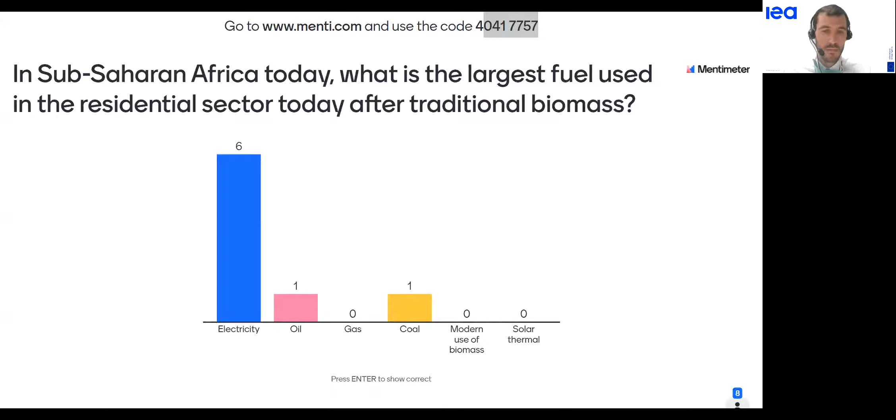Again, this question looks at sub-Saharan Africa as a whole. For such a question, the answers would be very country specific. In countries such as Nigeria and other oil and gas producers, it's very possible that oil and gas would have a large share of energy consumption in the residential sector. It can be gas through network, oil under the form of LPG for cooking, or oil under the form of diesel for backup electricity generating systems. These are indeed fuels that would be highly used in some countries.

The right answer is electricity, and you voted right for that, as this is the number one fuel used in the residential sector after traditional biomass. Thank you for your answers. So this was the situation for today.

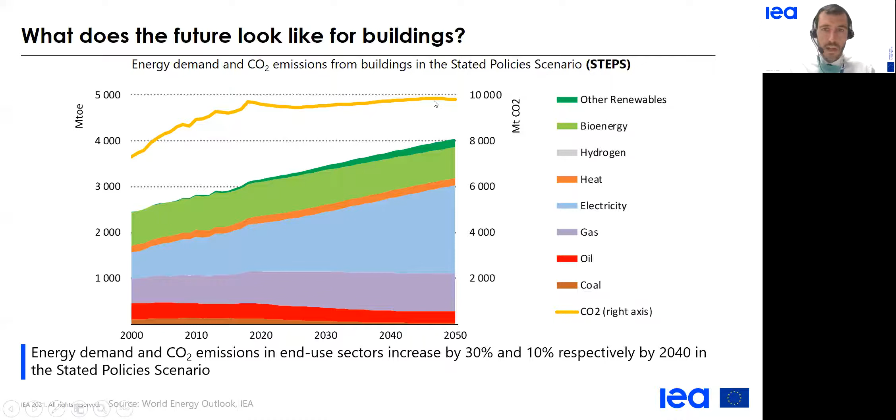So this is under the STEPS scenario, but a different future is possible. This is what it would look like under a sustainable development scenario, with universal access to electricity and to clean cooking, and with climate-driven objectives aligned with the COP21 Paris Agreement.

You can see that the CO2 emissions would sharply decrease, and this is due to a phase out of coal and a strong reduction of oil and gas at the benefit of electricity. What we would also expect here is much more energy efficiency to be able to do more with less energy.

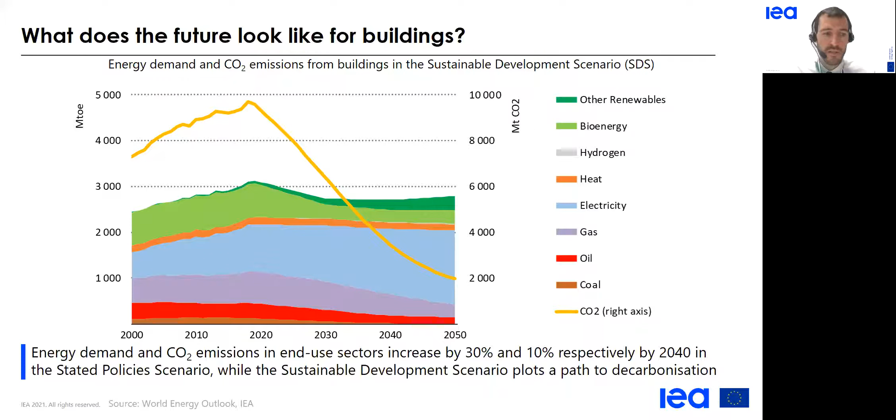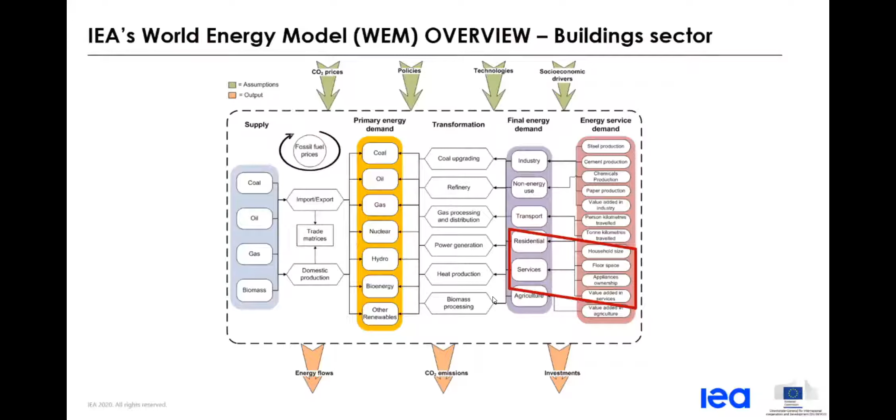When looking at this overview, we should not forget that an important additional feedback needs to be considered: the impact that electricity and heat prices and fossil fuel prices have on end-use demand in general, and in this particular case, on the energy demand in the building sector.

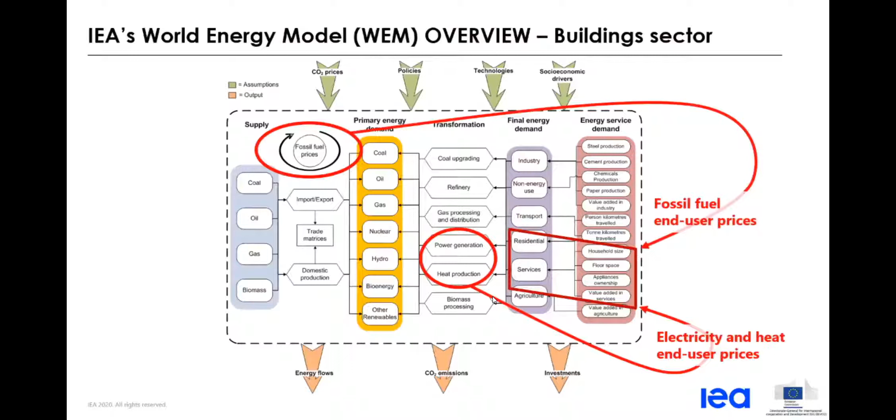When working on the sector, the first step before doing any modeling is to analyze what do people want. What they want and use are called energy services. In the building sector, it can be space heating, cooling, lighting, cooking, etc. To meet service demand, we need energy, and this energy is consumed by different technologies. In the building sector, it can be air conditioners, light bulbs, radiators, etc. And for each equipment, we also have its associated efficiency.

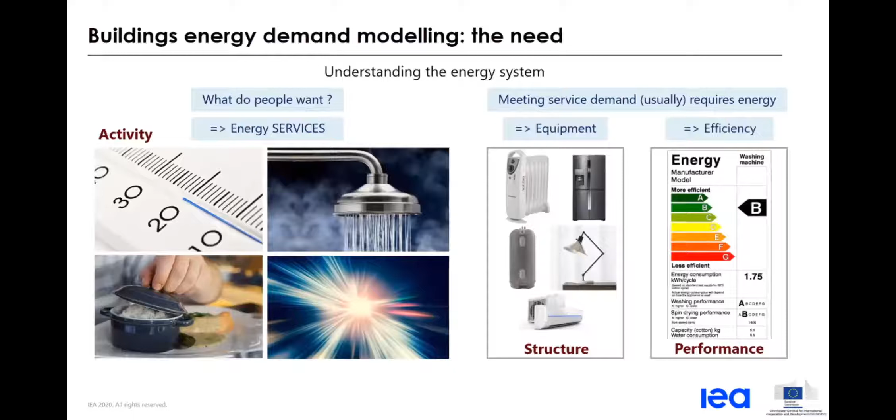We therefore can distinguish three areas: activity, structure, and performance. The activity is linked to the energy services. The structure is linked to the type of equipment present in the building sector, and the performance is linked to the efficiencies of the different technologies. And all of this needs to be depicted in the model.

If we look in more details at the structure of the building model, we see that we have different parts that make up the model. The first part includes all the inputs that are needed to do the modeling: historical data, regarding energy balances, building stock, equipment sales, and also socioeconomic data like population, electrification rate, or GDP. And we also do some assumptions for the evolution of some of these data, so for instance, population.

Some of these inputs will be used to compute energy service demand drivers, like household occupancy, floor area, or appliance ownership. Of course, these drivers will differ for each subsector. Indeed, the drivers are then used to determine the future useful energy demand, or the activity, as mentioned earlier. So for instance, for space heating, we can use the floor area as one of the drivers.

In addition to that, we also need a number of historical and future technology data that describe the structure and performance of our system. These data include the efficiencies, the lifetime, the market share of the different technologies. We can then compute for each end use what technologies will meet the service demand, and we will finally estimate the energy demand by subsector and by fuel, as well as the investments and CO2 emissions.

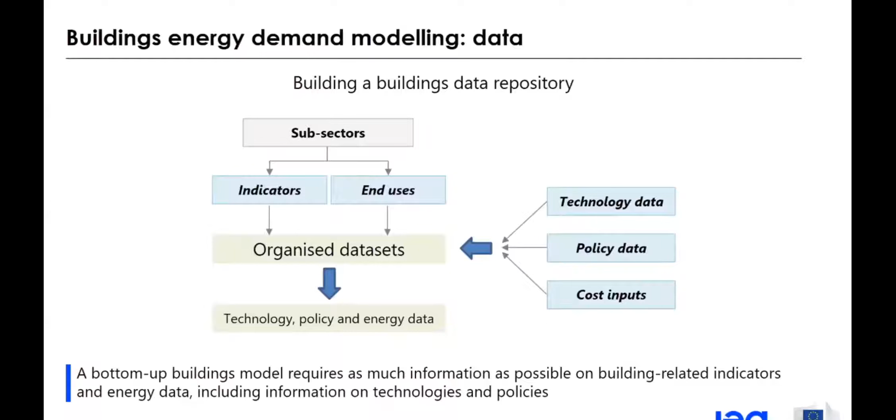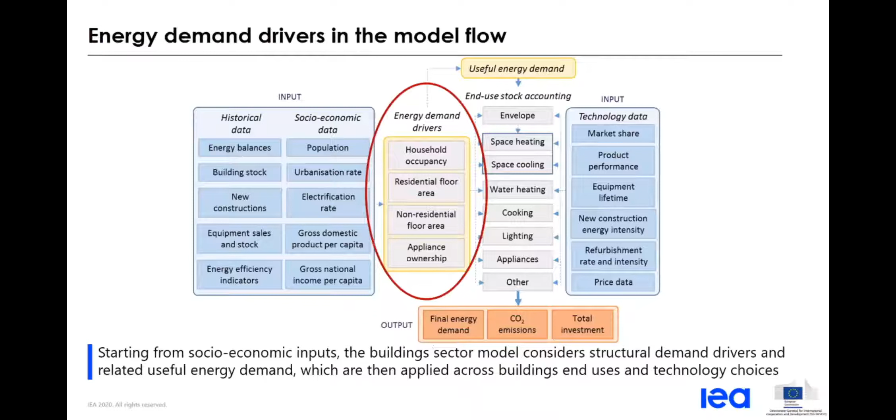As mentioned earlier, one important step of the modeling process is to define energy demand drivers, as they play a key role in describing energy consumption patterns in energy models. Thus, it's crucial to define the best proxy to describe past trends and possible future ones.

Before looking in detail at drivers and different methodologies to estimate them, here is the general structure for modeling end-use sectors. First, with drivers and econometric analysis, we estimate the evolution of energy service demand, or useful energy. Then, to meet the service demand, we allocate different technologies. In the case of the world energy model, we use a cost-based approach. Then, with the efficiencies of the different technologies, we can compute the final energy demand.

Going back to the drivers, we will look over the next slides at possible methodologies to identify the best proxy for each subsector. The projections of activity variables can be based on regression with respect to GDP or electrification, but we can also use different types of curves, like the S-curve. And as mentioned earlier, this requires using different data that can come from the IMF or other national reports.

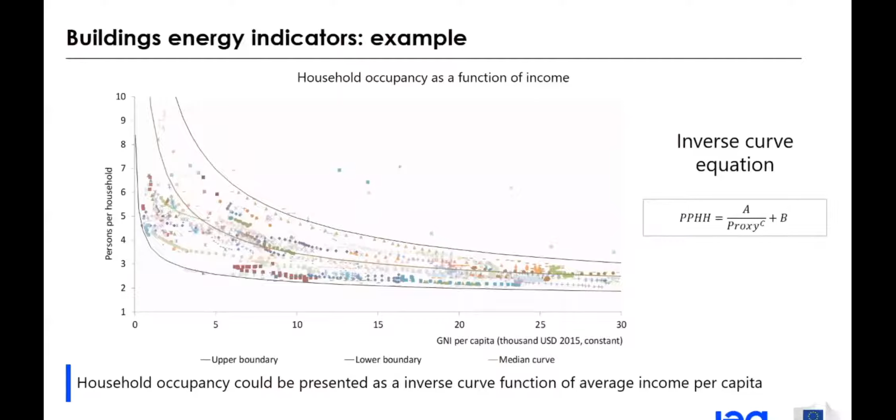So that's household occupancy. Now, another example of a relationship of interest to us in building's energy demand modeling is ownership variables - how the ownership of a given appliance, such as a refrigerator in this example, evolves over time based on another variable.

So here we've plotted ownership of refrigerators for all the countries and years for which we have data, plotted against a discriminant criterion, but we could also plot this against GNI per capita or GDP per capita. The most important variable on the x-axis is income in this case. If we build this chart and fill out the data...

We can clearly see there is an S-curve relationship between refrigerator ownership, the average number of refrigerators per household, and average income. As income increases over time, we reach a point where refrigerators per household start to really increase. Then as households become increasingly rich, the growth in refrigerator ownership slows down, because once we already have at least one refrigerator on average per household, there's less need to purchase additional ones.

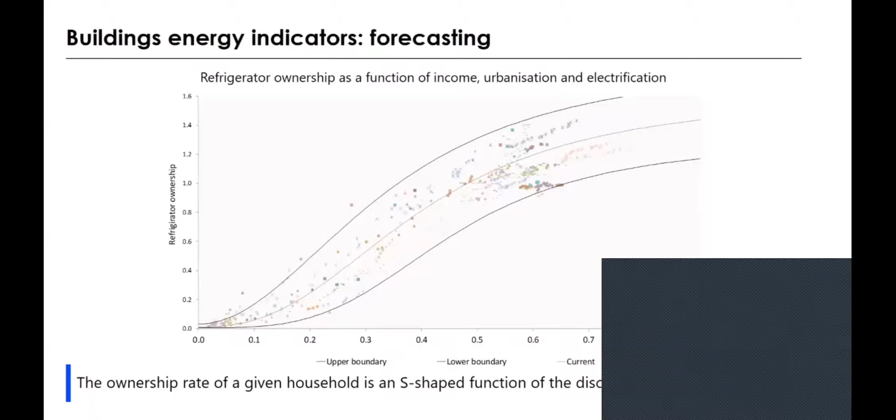So the S-curve is a very important indicator for understanding the relationship between many economic variables and the activity variables that interest us for buildings energy demand modeling. I'll get to a description of the discriminant criterion and how we can draw upon several economic variables to influence and describe this curve in just a minute. But firstly, I'd like to go through an example of air conditioning ownership.

Here we've done the same thing as in the previous figure. We've plotted on the y-axis the average ownership of air conditioners, and on the x-axis the average income per capita. We've used all the data points in our database, and we can see it's a big cloud of points without a very strong relationship. So here it's difficult to imagine an S-curve describing the evolution of air conditioner ownership with income.

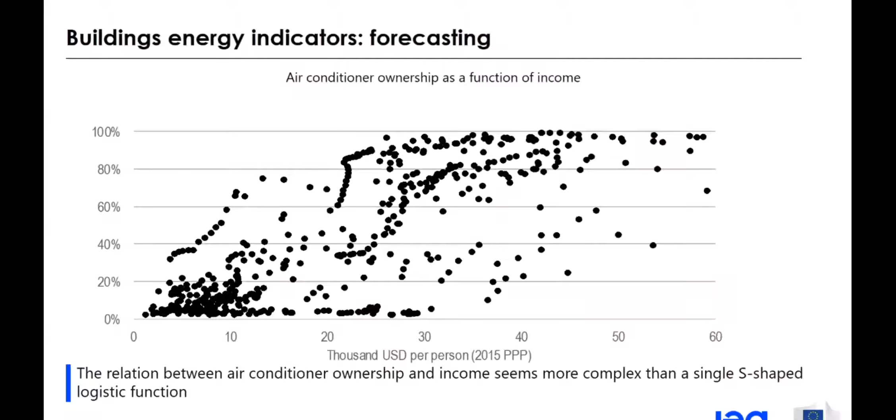But when we bring an additional piece of information to the picture, we start to see much clearer relationships. Now we plot air conditioner ownership and income depending on the need for cooling in that region, described in terms of annual cooling degree days. A cooling degree day is a variable calculated based on the threshold temperature in a given country and the average daily temperatures within that country.

Here we can clearly see that for countries in darkest red, the countries with the greatest cooling demand need, there is a relatively strong view of an S-curve that evolves over time. As incomes start to increase in those countries, the rate of air conditioner ownership rapidly increases and moves towards one, an average of one air conditioner per household.

However, if we look at countries in blue, with very low cooling needs, we can see that even when average per capita incomes increase to very high levels, air conditioner ownership stays quite low. These households, despite their high incomes, are prioritizing other needs because their cooling needs are not very high or pressing. So the message here is that sometimes we might have just the economic variables, like GDP per capita, and some information on ownership, but that's not enough to define a clear trend and a clear curve that can be useful for us.

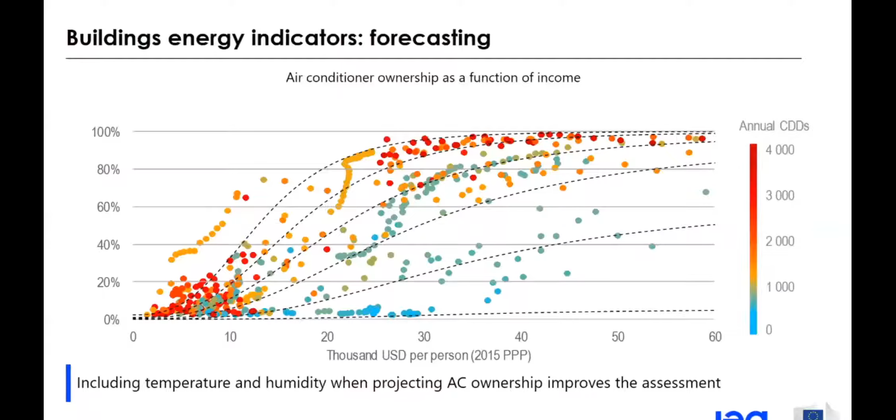So sometimes we need to bring additional data to the table to help us understand the evolution and the relationship between the economic variable and the activity variable that interests us.

Before going on, I'd like to summarize some of the key end uses that we model in a bottom-up fashion in our buildings energy demand modeling, and the activity variables that we use to describe the energy service demand for that end use. Then the proxy, the economic variable that helps us understand the relationship between evolving economic conditions and the activity variable. And finally, the type of curve and equation that we use to connect the proxy with the activity variable.

Firstly, with cooking, the first curve we saw was an inverse curve. For cooking, we use people per household to understand the evolution of service demand—that's our activity variable. As with all end uses in buildings, we use GNI per capita, or GDP per capita, as the most important proxy. We take our projection of GNI per capita from other assumptions, like World Bank or IMF, and population from sources like the United Nations. We then use this variable via the inverse curve for cooking to describe people per household and its evolution over time.

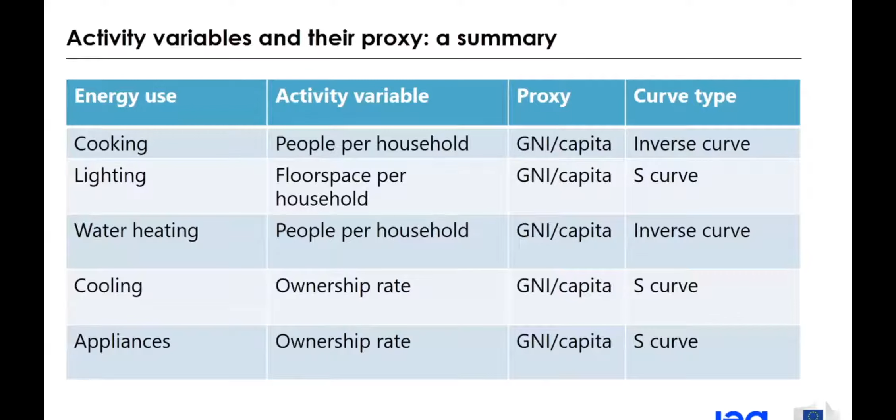Now I want to come back to the fact that sometimes we bring in additional variables to help describe trends. On the left-hand figure, the x-axis is GNI per capita, an income proxy, used to describe the number of units per household. But we can see the curve is quite cramped—it's not an easily defined S-curve. That's because in the first, say, $5,000 of GNI per capita, a huge number of people suddenly buy refrigerators very rapidly, and perhaps GNI per capita isn't the perfect variable to understand this first part of the curve.

On the right-hand figure, we use a discriminant criterion—a variable without a unit, an indicator that combines several proxies. It combines GNI per capita, the economic variable, but also brings in information on electrification rate and urbanization rate within the country. When we plot this data, we clearly see that not only does the economic variable influence ownership, but so does electrification rate and urbanization.

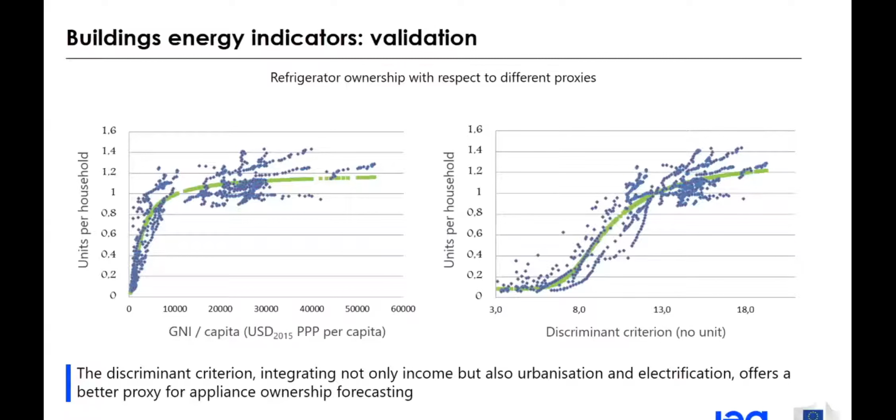This is multivariate analysis and multivariate regression, as opposed to the earlier examples shown, which used a single variable, so GDP per capita in those instances.

Okay, now let's run through the principles of multivariate analysis, using many or several economic variables, population variables, or other interesting variables for which we have information to describe the evolution of activity variables.

The first point is to look at the data we do have. So taking the data on, say, refrigeration ownership, selecting a set of data points which seem like a good, clean trend, and then trying to match these data points with available variable data on GNI per capita, or GNI absolute values, electrification rates, weather data, or any other variables that might be available.

Then what we can do is plot all these variables together on a chart. For instance, we'll have refrigeration ownership on the y-axis, and we'll plot that on the x-axis against lots of different variables, again and again, to try to understand if there's a relationship between refrigeration ownership and the variable on the x-axis.

What we achieve by doing this is we identify the most important variables that seem to have some sort of relationship with refrigeration ownership. Then we can partition the data into similarities, based on what the data is actually describing.

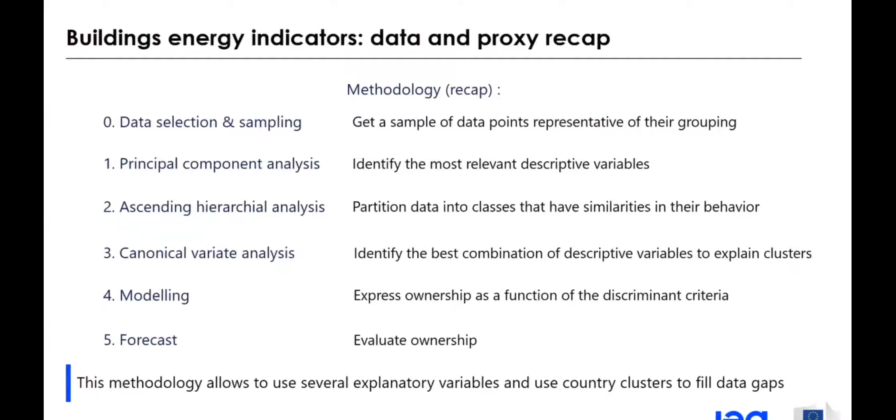Now, the final point I want to make before I pass on is what we do with lacking data and how we project the variables that interest us when we do not have the available historical data.

To take a step back, the first thing we do is bring all the data we have together for all the countries that interest us. Then we divide the countries into different classes based on the category of the country—for instance, bringing together countries that have similar economic contexts, similar climatic and population growth contexts.

So here on the left, we can see we've put countries, so country A, B, and C into different classes. We have several different classes for countries across the world. But for instance, if you're looking just at the African region, it might be pertinent just to have one class and not bother about defining different classes.

Once we've done that classification by class, we need to look at the data availability for each country within each class. If we take the example of country A, it is a country that is well informed in terms of data. We have historical data available for many years for the activity variable that interests us, such as household occupancy, refrigeration ownership rates, or floor area per average household. So we have the information we need historically to build a robust equation that can be used for the projections.

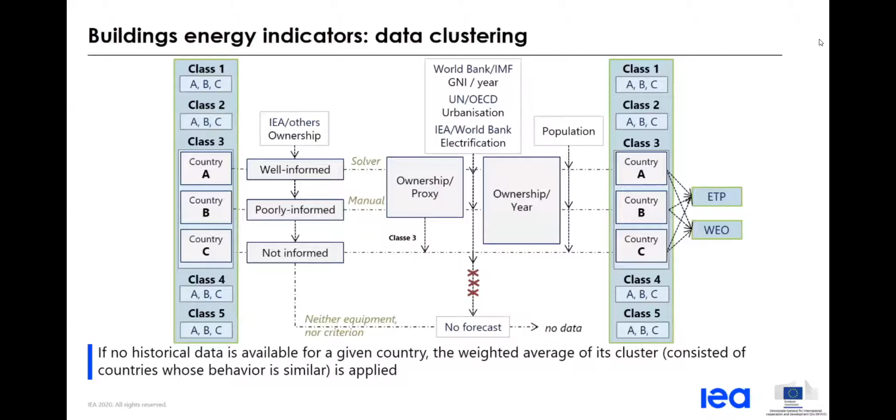But we shouldn't forget that for country B, we do have 1 or 2 data points. So what we'll do is shift the curve up or down to make sure it runs through the most recent historical data point we have available. This ensures we can use these curves to describe the trends for the 1 or 2 data points we do have, to backfill the missing historical data, and to understand how these activity variables will evolve in the future.

The final situation is country C. This is a country for which we have no data at all for activity variables for the end use that interests us. In this case, we have no other options—all we can do is take the average curve of class 3, the average of all countries within this class. So country C will just be described by the average throughout, because we don't have any data points to shift and run through.

So we go straight through to the projections of the activity variables using the economic variables specific to country C, but using the S-curve or inverse curve equation that is the average of all countries in class 3. This is a very important point on how to find the data, what to do with the data, and very importantly, what to do when we don't have the data needed to build these curves and project the activity variables.

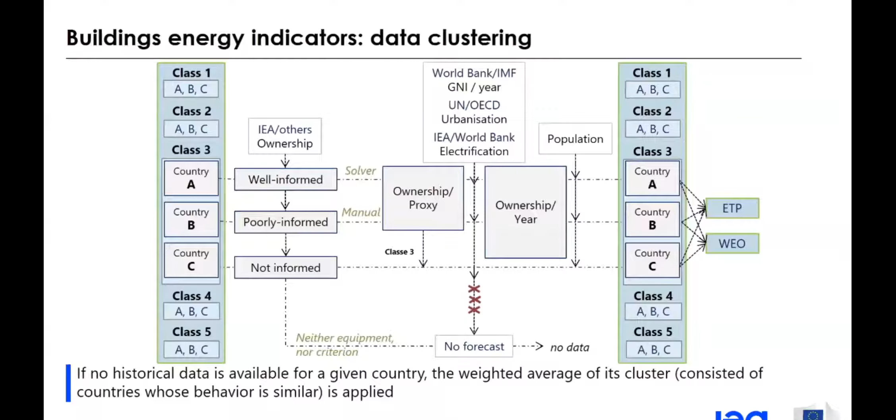Alternatively, there can be specific literature on a specific country based on surveys conducted within that country, or based on academic work. But basically, the first step is certainly to look for the data that exists for the end uses that interest us most, and to contact or reach out to as many people as you can to try and get the best data and ensure you start with the strongest foundation.

So back to our presentation. You heard from Tim and Ariane about activity structure, performance structuring of our modeling work, as well as the drivers and how to manage those large amounts of data, how to benchmark with other countries with data available from other regions or from the past, so that we can build on them.

Now I would like to first take any question you may have on what was just presented, or hear any reaction, any comments, and then I will have some more questions for you in the live polls. I'm pausing for a second for you to be able to write questions.

So first question from Mr. Ibrahim Sulu: Why is agriculture categorized under buildings? This is more of a statistical treatment and typology definition. We usually break down the energy end-use sectors under industry, transport, and building plus others. Building will include residential, so private housing, plus services like buildings used for banks, enterprises, etc. This can also include agriculture and other end-use sectors. It's more of an international standard. Sometimes you find agriculture as separate, and sometimes inside.

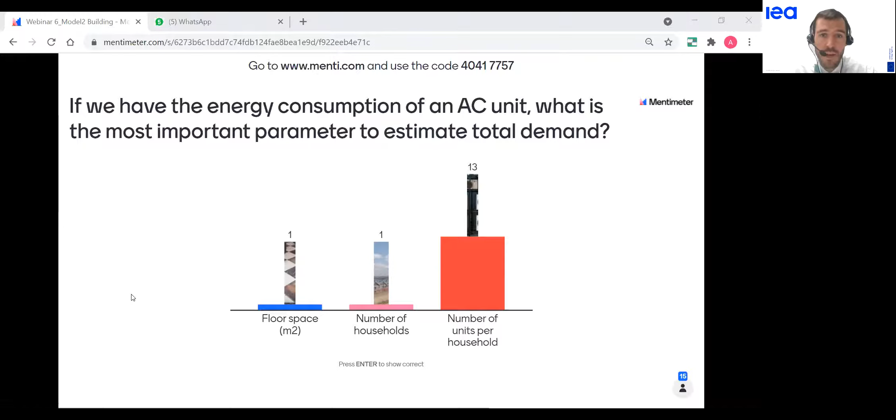Okay, so you're mostly voting for the number of units per household. There's no good or right answer here. What's for sure is that in our reasoning we can think at the household level, looking for one average household, how many units we have. We know how much energy one unit consumes, and then we multiply by the number of households in the country to get numbers at the country level. Floor space can also be a very interesting proxy—if people live in small houses, maybe one AC unit or fan is sufficient, but if they live in wide places, they might need more than one unit. It can also be a question of income—how many units people can afford—and then it might be about other indicators.

So another question now, looking at water heating: if we know how much a water heater consumes in terms of energy, what would be the most important parameter again to estimate total demand? You can think that we have multiplier factors, like the number of households, to move from the scale of a household to the entire country. We have the activity variable, and we have proxies which give good indications on how the demand for the service would evolve.

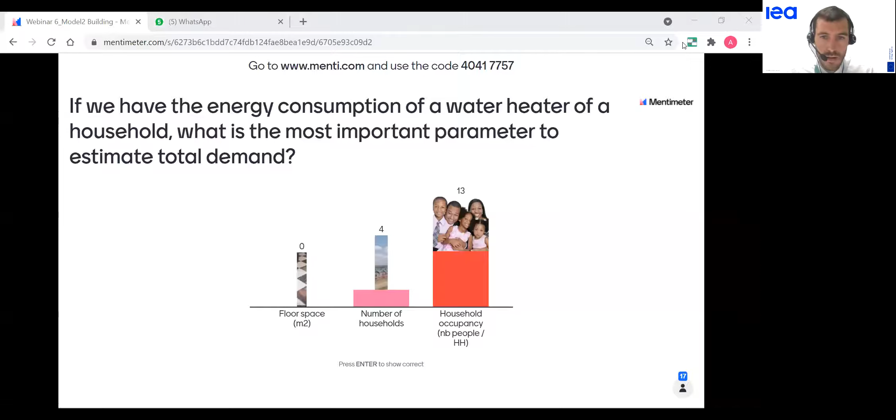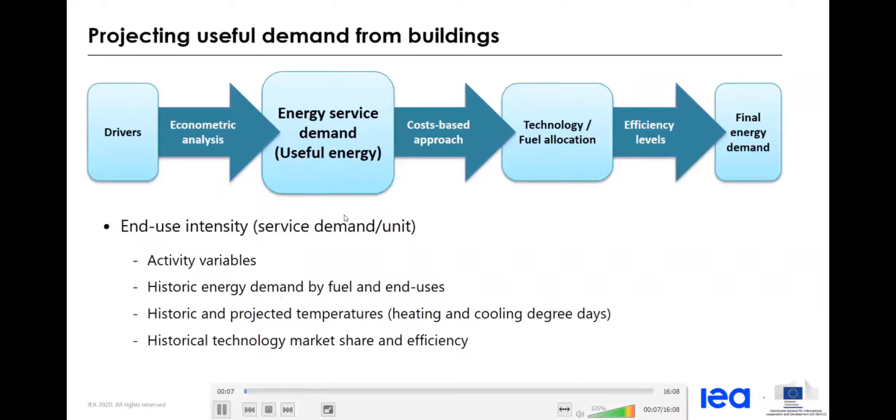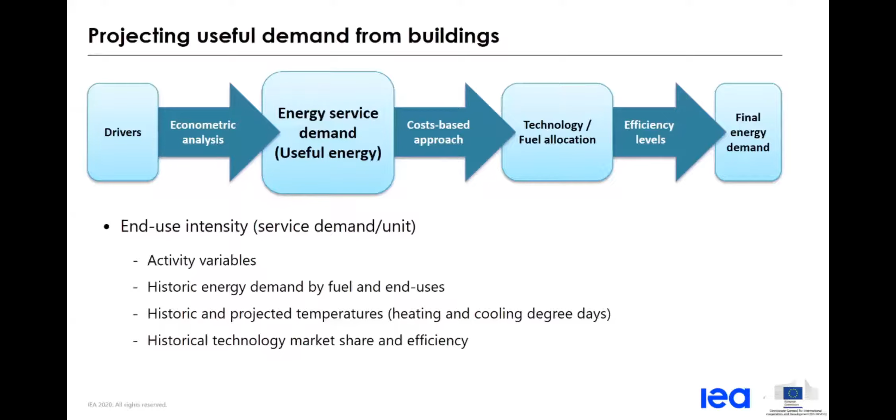Once we have determined past and projected activity variables and service demand intensity, the total energy service demand, or useful energy, can be computed. For this, we can rely on end-use intensity, derived from our projections of activity drivers, as well as other data from our database, like historic energy demand by fuel and end use, historic and projected temperatures, so we usually use heating degree days and cooling degree days, and historical technology market share and efficiency. With all this information, we can compute the energy intensity per square meter for space heating.

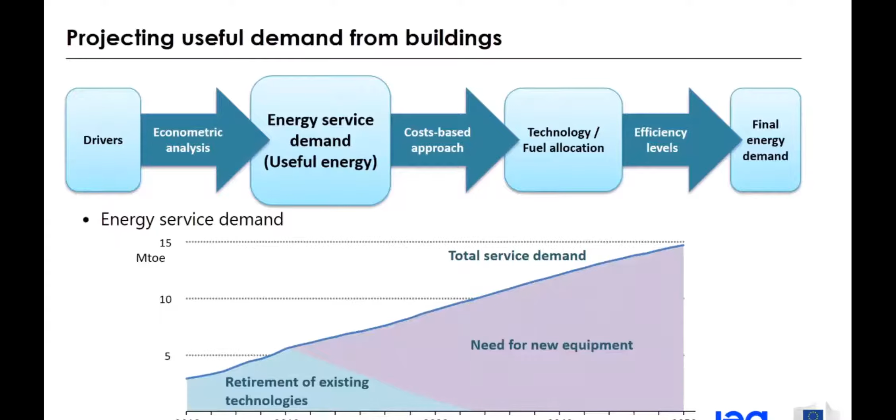Once we've obtained the total projected service demand, we can reflect on which technologies will meet the demand. For each year of the projection, we can compute the total energy service demand that needs to be satisfied by new equipment, by accounting for new incremental demand and considering the retirement of existing technologies. In later years of the projection, we also have to take into account the retirement of technologies that were added by our model.

So how do we do this? For this, we need to have a detailed stock, and with the lifetime, we can determine the remaining stock for each year of our projection, and finally compute the service demand to be met with new sales. So the sales of new equipment need to replace previous equipment and to meet new demand for energy services. You can see that the lifetime of equipment and its age distribution can play an important role in the capability of the system to renew the overall technology stock.

In countries with burgeoning energy demand, such as developing countries, the share of replacing old infrastructure and technologies is more limited, while its weight is more important in advanced economies.

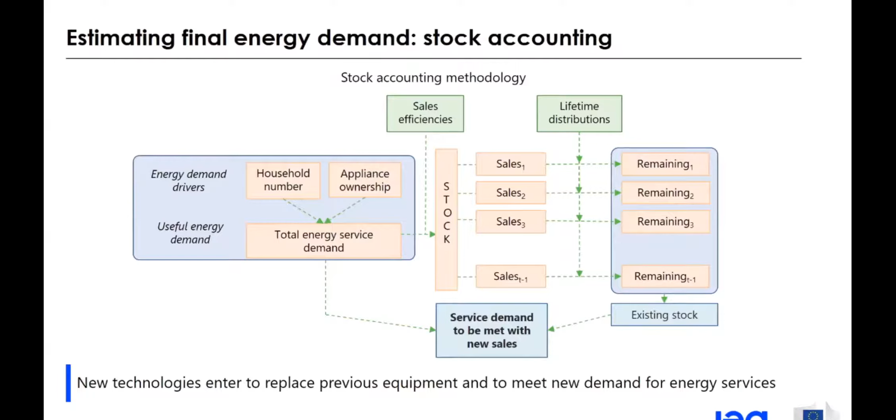Now we have to determine which technologies will meet the service demand. The technology and fuel choice depends on a variety of elements, first of all on the available technologies for each subsector in each market considered. That's why we have an important database with all technologies available in each subsector. For instance, you can look at the cooling subsector and see the different types of air conditioners that are in the model.

The choice of technology depends on various parameters. The available potential of renewable resources can play a very important role, as well as several energy policies such as energy efficiency standards.

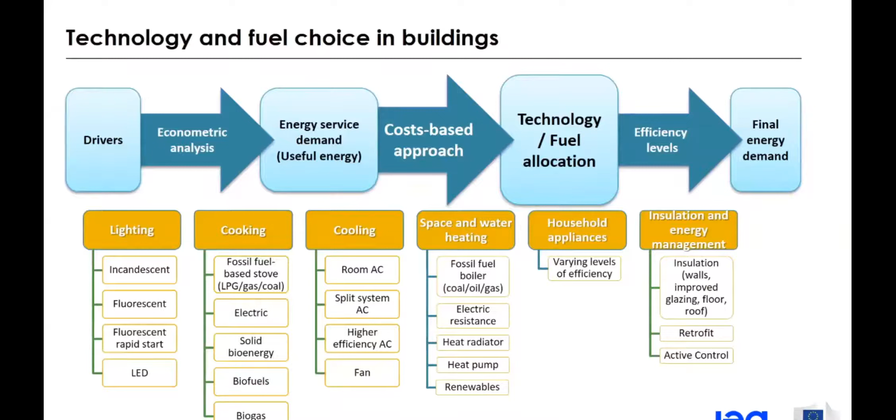In the World Energy Model, we rely mainly on a cost-based approach to determine which technologies will be installed. For this, we need to compute the cost associated with each technology, which includes the investment cost as well as the operation cost. For instance, for an air conditioner, we must take into account the price of the AC, but also the price of electricity that will be consumed by this technology.

In our model, we assume that the technology share will be proportional to 1 divided by the specific cost of this technology. This least-cost approach is often the most used criterion to select technologies, but it's also important to consider boundaries to reflect market failures, behavioral patterns, and energy policies. For instance, we can set a minimum target for heat pumps to be installed if we consider that energy policies are pushing the development.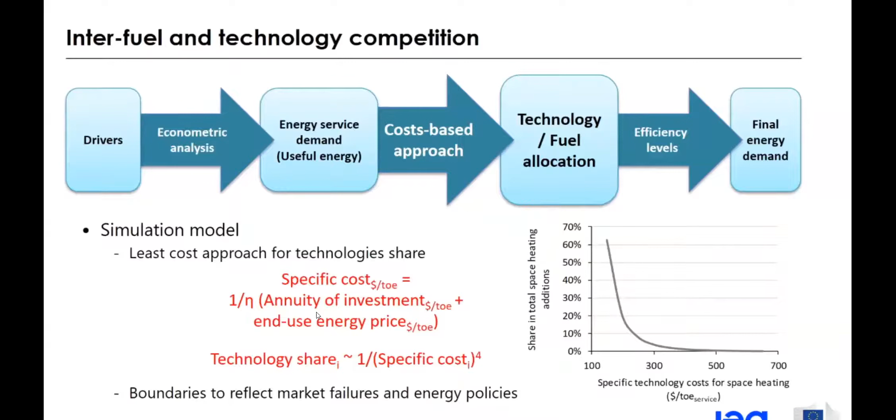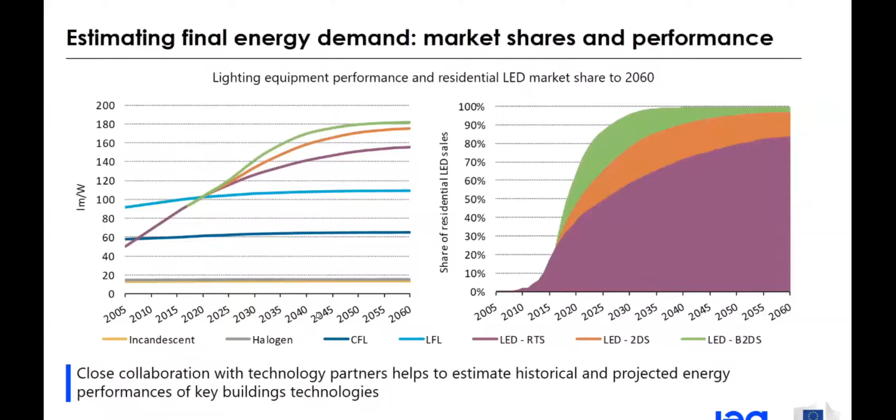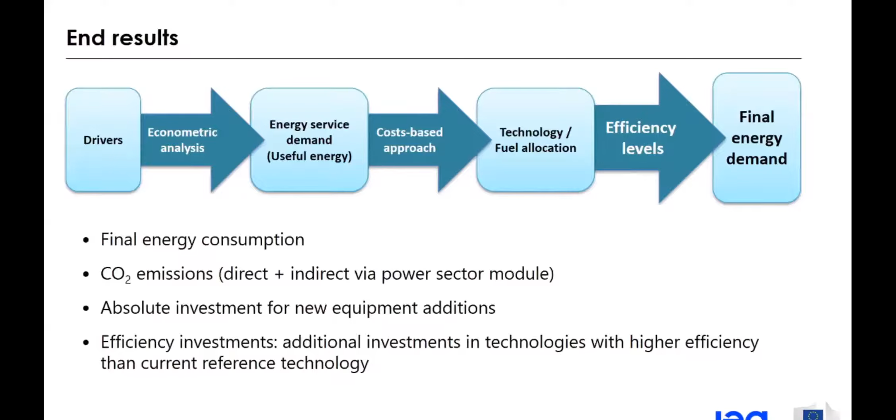As said before, once the technology choice is determined for each subsector for each projection year, together with the market share, efficiency, and fuel of use, the final energy demand can be computed, as well as the related CO2 emissions and the investments that are needed for new equipment additions.

In the last part of this building's energy demand modeling session, I would like to provide several examples of the results of our modeling, specifically applied to the Africa context, and use these results to reinforce the importance of efficiency gains and understanding the impacts of improving efficiency and changing technologies on energy demand. These are some of the results that we can then communicate to policymakers to reinforce certain messages and the importance of taking steps and putting in place policies to achieve energy objectives.

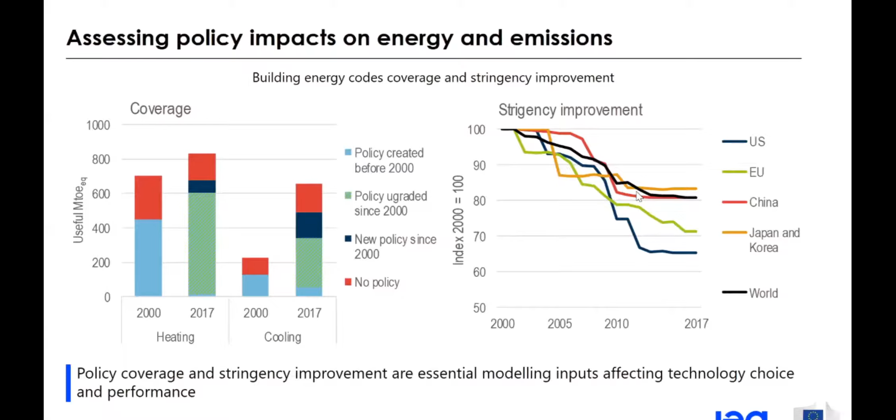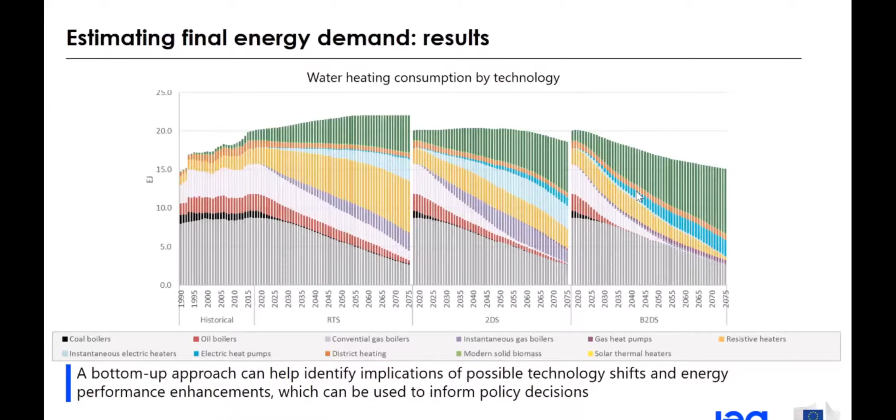If we take the example of water heating, we're looking at the evolution of energy demand in 3 different scenarios. The first, the RTS, is similar to STEPS, looking just at policies in place and announced, whereas the 2 scenarios to the right are more ambitious, meeting climate objectives: a 2-degree scenario and a below 2-degree scenario. What we see here are pure outputs of our model when we impose the constraint that we need to reduce emissions in line with a certain scenario, so 2 degrees or below 2 degrees.

That means we need to see a big change in the fuel mix. This is bottom up, coming from us saying we need to allocate a renewable technology as opposed to a fossil fuel fired technology, and these are the evolutions of the energy mix that result.

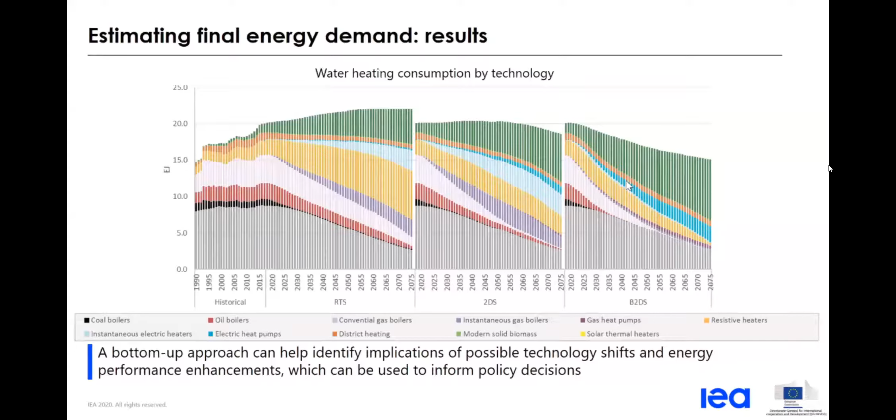So it's these kind of results that can provide a visual communication of what the modeling is doing, and help us bring together key messages and key numbers to communicate to policymakers who can then act on the information coming from the model.

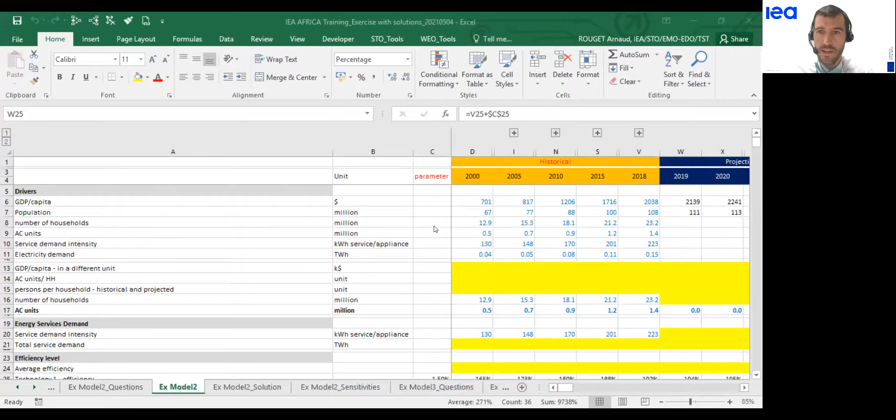Okay, now you should be able to see my screen. You were given a simplified model with historical data as well as projections. So we have socioeconomic drivers as usual, GDP per capita and population, with both historical data and projections that would come from the International Monetary Fund or from the Ministry of Finance, for example. Then we have data related to our topic of residential cooling: number of households, number of AC units in the country, service demand intensity, and total electricity demand for cooling needs. We know how these parameters have evolved over the past two decades, and we want to make projections.

I won't go question by question, but I'll show you the reasoning steps. You were asked, starting with the drivers, to look at how many AC units, how many equipments, we should expect to find per household in the future. Then, as we can easily deduce the number of households, we'll be able to make projections on the total fleet of equipment, the total number of AC units.

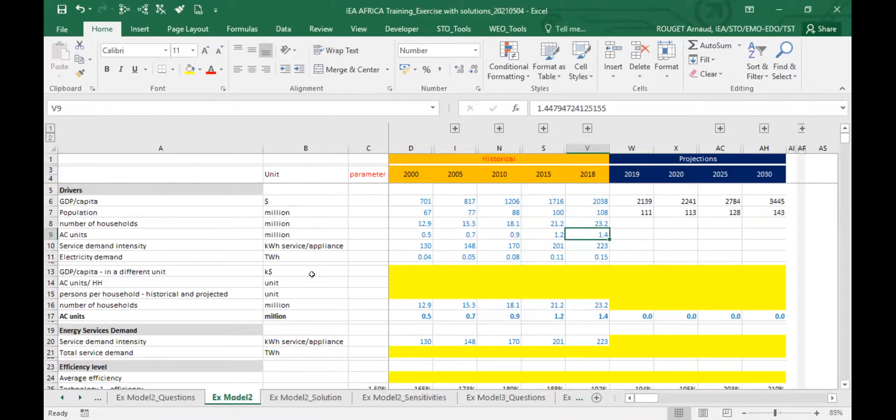So in the year 2000 we had 500,000 air conditioners. Today we have 1.4 million, and as a first step we'll try to estimate how many there will be in the future. To do that, we'll look mostly at the scale of one household and try to understand how many AC units there are today per household and how this would evolve.

Moving to solution one, AC units per household: we have the number of AC units in the country and the number of households, so we just divide it. When it comes to making projections of AC units per household, there are different ways of doing it. Again, we could just project what the past growth rate was, but what we'll try to do here is a bit different.

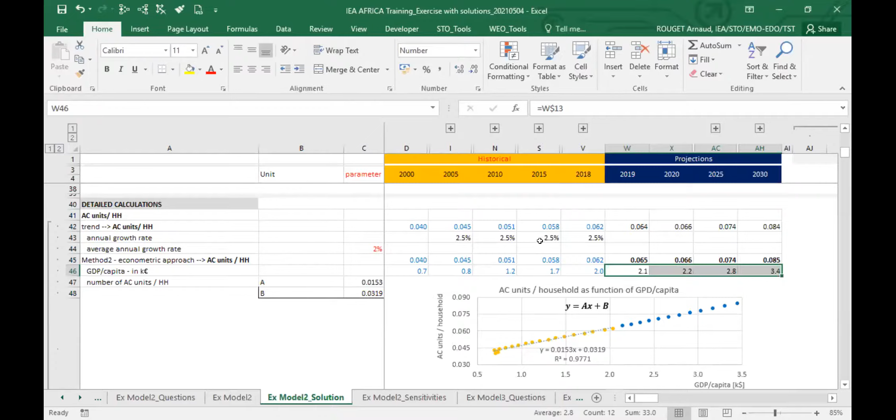We'll look at how GDP per capita is evolving and how the number of AC units per household has been evolving too. This is what we call an econometric approach. We put on this line the evolution of GDP per capita—historical data plus projections, again provided by the Ministry of Finance, for example—and try to deduct the number of AC units per household. So we express those two parameters, one as a function of the other. On the horizontal axis you have GDP per capita, and on the vertical axis, number of air conditioners per household.

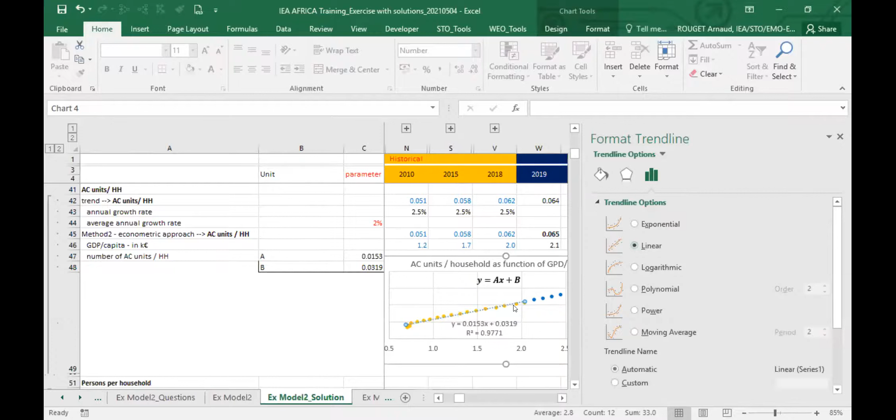The yellow dots are the historical data we have. Based on this, we created a trend line in Excel, and depending on what your formula looks like, you could choose different types of trend line options. Here we've taken linear—this is the blue small dots line you can see. With this line comes a formula: y equals a factor a multiplied by x, plus a constant b. Excel automatically calculates and gives you what a and b amount to, so we have the parameters for this formula.

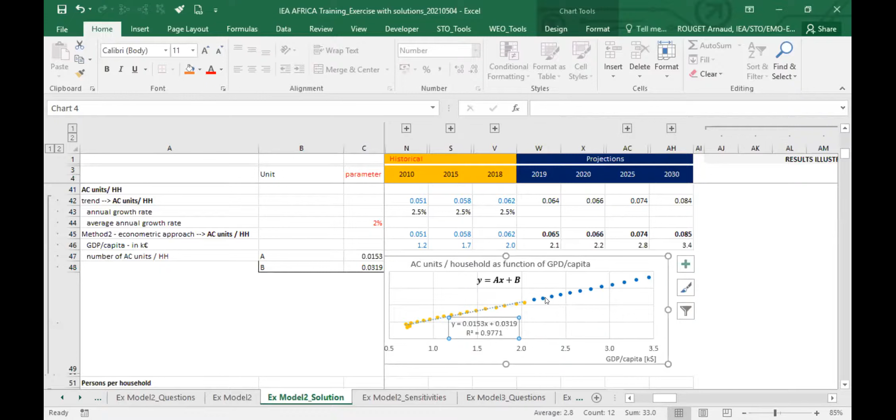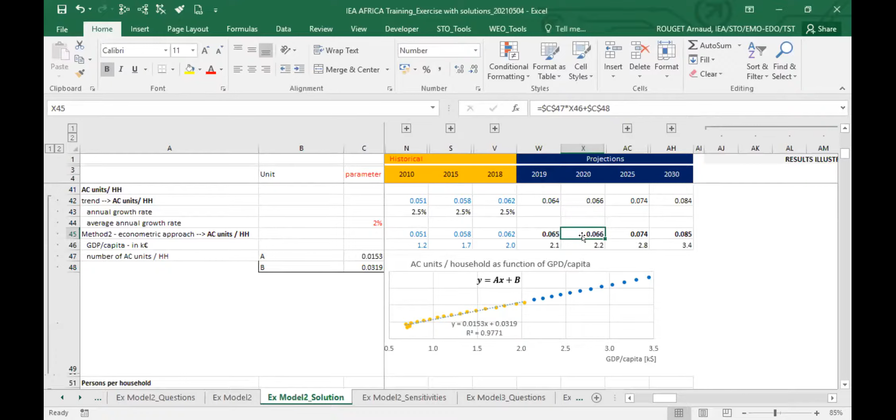If we want to make a projection similar to what happened in the past, we can just continue the formula. We know how GDP per capita will evolve, so we can deduct, based on this function, how the number of units per household will evolve in the future.

So this was one step to deduct future level of equipment per household. Then number of people per household. We have historical data, and we could find some data from the statistics agency looking at demographic trends.

We could make projections based on how things have evolved over the past two decades. Here we tried an econometric approach, looking at the relation between GDP per capita and number of people per household. The idea is that if you look at a large number of countries with similar characteristics and a large amount of past data, you can establish a relation between how rich people are and how many people are in a household. This is what we do here.

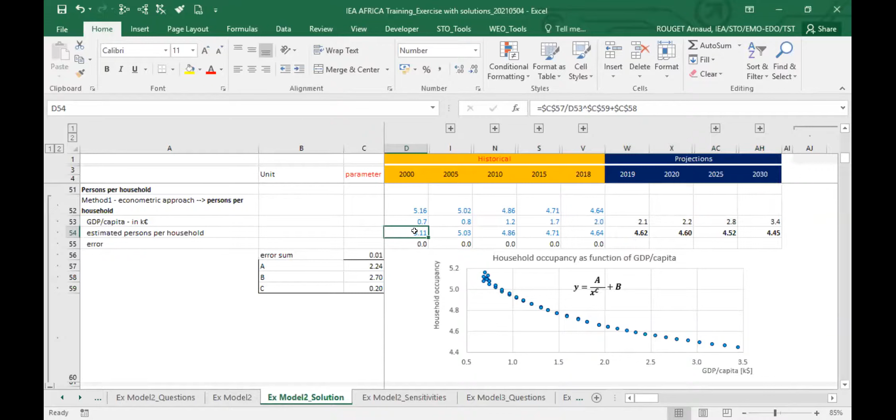That's exactly the same as what we did. We enter GDP per capita historical and projected data, and we enter for the historical data the number of people per household. We create a function of one parameter as a function of the other. Here we don't have a linear curve, but an inverse curve.

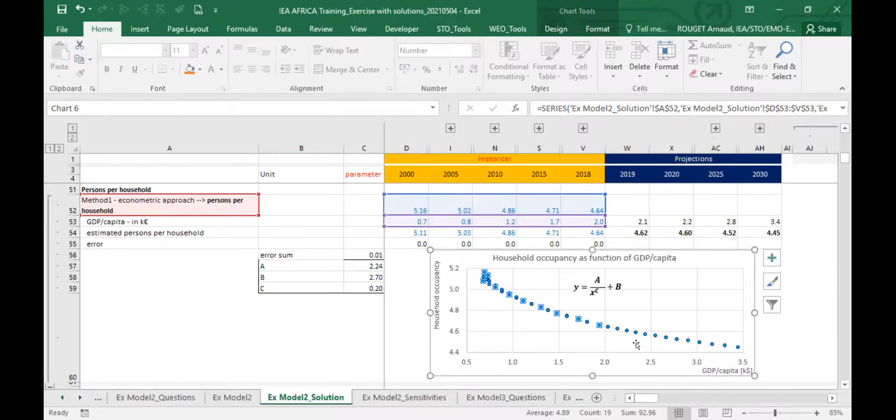Again we can ask Excel to add a trend line. It will not really be linear - maybe it's more polynomial, maybe more exponential. So we can try several, and we will get a mathematical formula where y, the number of people per household, is expressed as a function of x, GDP per capita.

Since we know how GDP per capita, or x, will evolve in the future, we can make the calculation to project. Here the calculation is a bit more complex because there are three parameters, A, B, C, and C requires a more involved mathematical calculation. But using, for example, Excel's solver functionality, you can automatically get your answers.

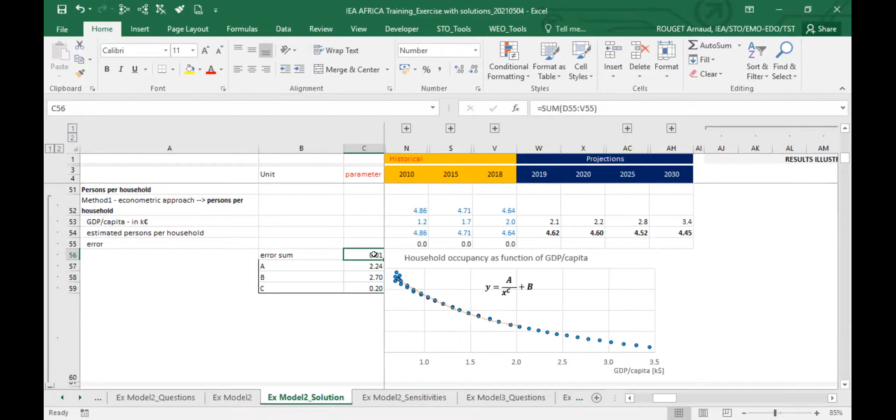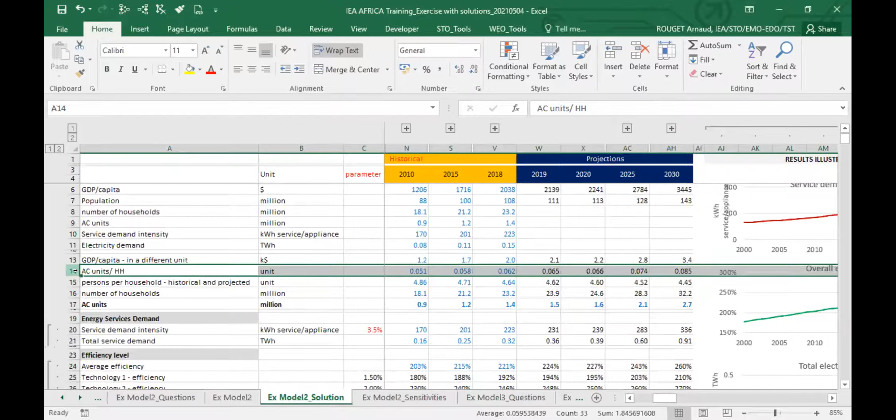So doing that, we made our own estimation of both how many air conditioners there will be per household and how many people there will be per household. We can deduct how many households will be in the country, and multiplying those parameters, we can deduct how many AC units we expect. This is much more accurate than if we had just made a linear projection, because in 2000 we had 500,000, in 2018 1.4 million, and we find we would have 2.7 million air conditioners in the country by the end of the decade.

This was the first step. Then we have to look at energy service demand - in other words, people have air conditioners, okay, but how much will they want to use it?

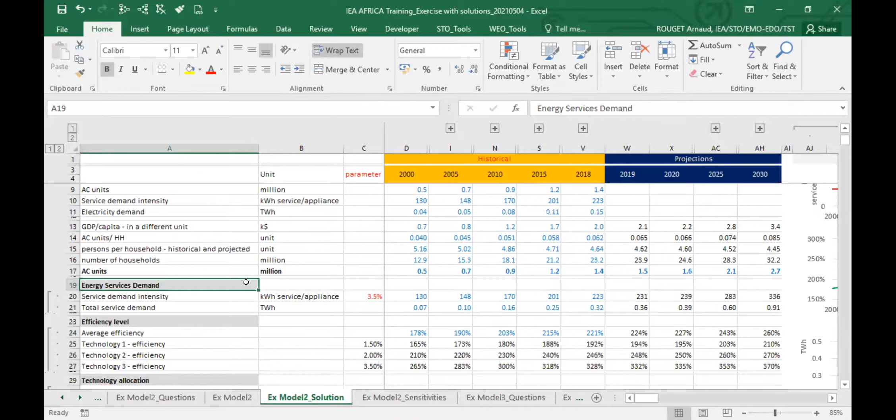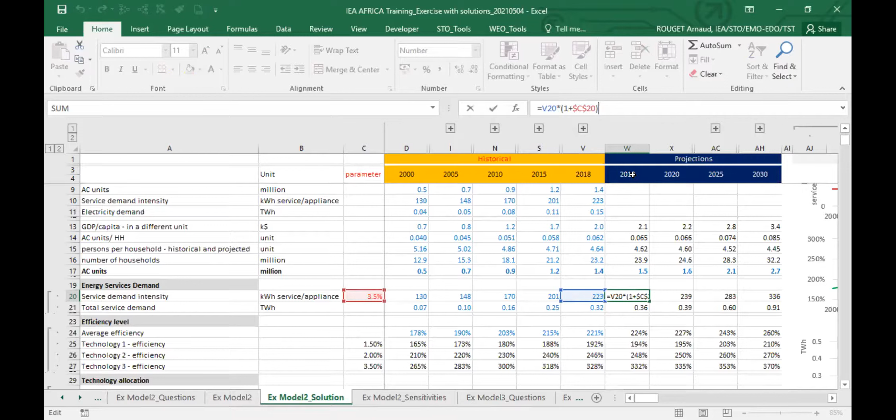Here again we have historical data that were provided. What we can do is just project future evolution based on the historical rate. We calculated the growth rate between 2018 and 2010, which is 3.5%, and we apply the same rate, assuming a 3.5% annual increase year after year by the end of the decade. Total service demand can be deducted because we know how many equipment units we have and how much kilowatt hour one equipment requires, so we can deduct the total service demand, which is getting closer to 1 terawatt hour of service.

This is not final energy yet, because we know the cooling needs expressed in terawatt hours, but now we need to see the equipment that will meet those needs. We have taken the assumption that we have three technologies - air conditioners of low quality, middle quality, and high quality - each with different levels of efficiency given to you.

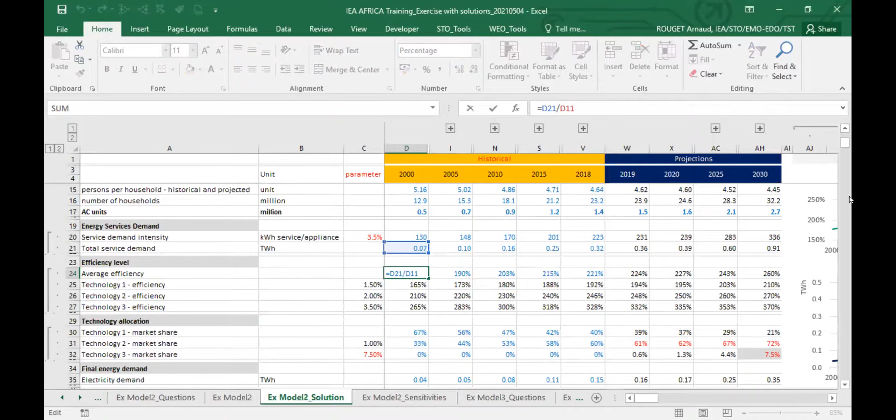It's asked to calculate the average efficiency, based on the total service demand divided by the total electricity demand that was given. So we get our average level of efficiency.

We need to work on the technology allocation, or in other words, what's the market share of each technology. This is where we can make projections, taking some assumptions.

You were told that technology number 3 was not yet available so far, but it starts entering the market in 2019, with a strong policy to bring it to 7.5% market share by 2030. So this is the target for 2030, and we can linearly attribute the value starting from 0 in 2018. Then technology number 2, you were told we expect it to increase by 1% every year based on current levels. Technology number 1 just takes the remaining share so that we have 100%.

So we know technology market share, we know technology efficiency, we can deduct the compound average efficiency of the total fleet of equipment. And from there, as we know total service demand and average efficiency, we can deduct the electricity demand for cooling.

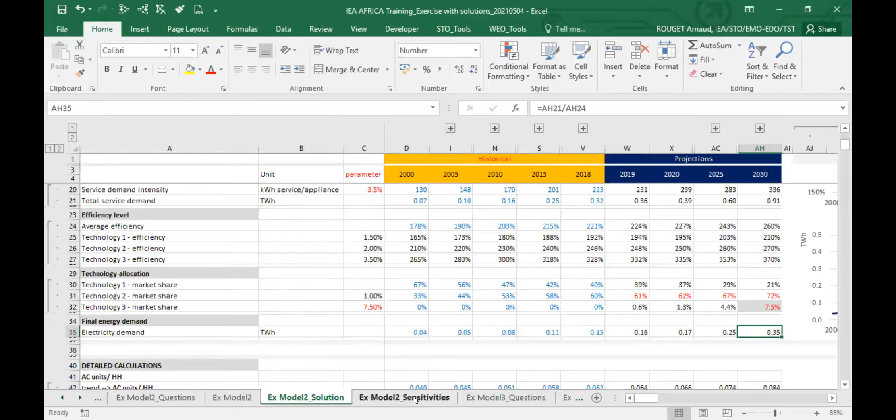And as we've done in the past, this is just one model taking assumptions. What is very interesting is to develop sensitivity analysis. Here we can develop different cases, saying that, for example, our base case was assuming that the demand for service would increase at the same rate as it increased in the past, so 3.5% every year.

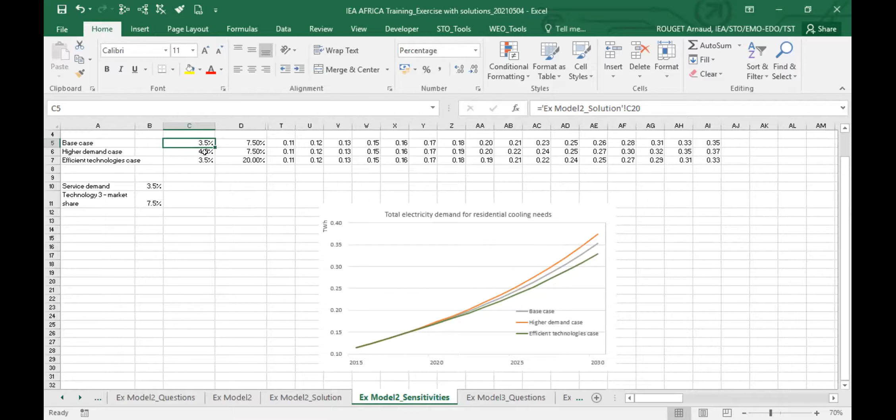But it could be increasing at a higher rate of 4%. Then we would have this orange curve in terms of total electricity demand.

But we could also have, on the other hand, some policies to promote more efficient technologies. For example, our air conditioner technology number 3, which is much more efficient, could be promoted more by policymakers and could reach 20% rather than 7.5% market share by 2030. In that case, the average fleet itself would be more efficient and we would reduce significantly the demand for electricity.

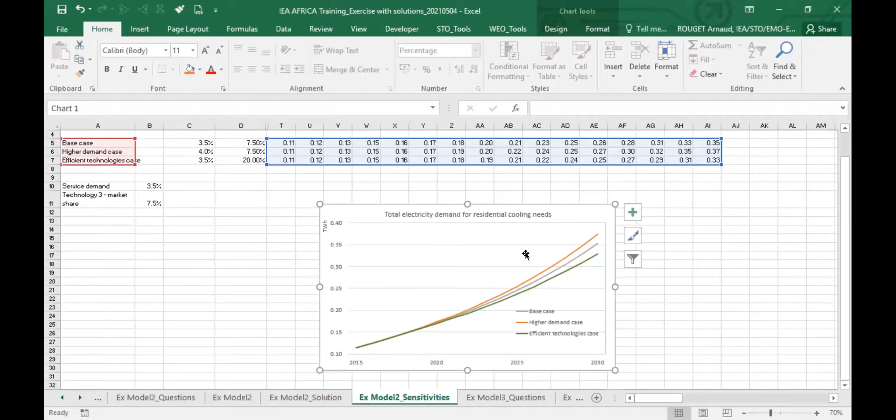So I'm stopping here on the Excel exercise.

And now happy to take any question you would have on the exercise itself, or on the presentation, and on what you heard from Tim and from Ariane.

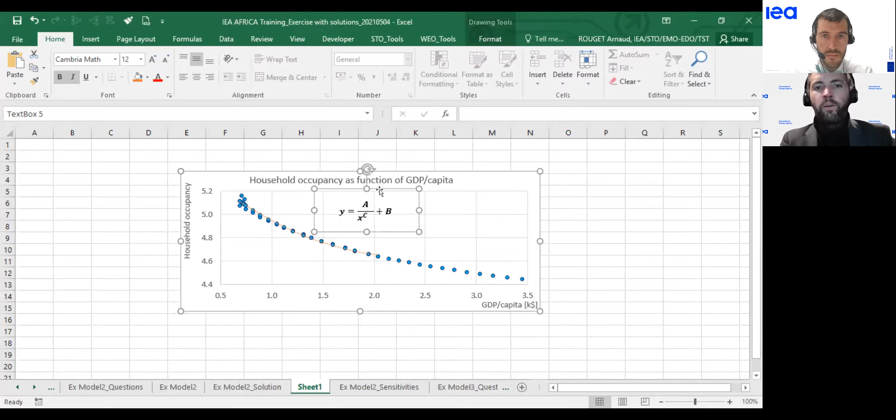And you'll find as well that in Excel, when you plot the data that you're interested in, so this data could be the gross national income against the, say, refrigeration ownership or television ownership, then you can use Excel to plot a trend line. And for that trend line, you can choose different types of equations, like a straight line, y equals ax plus b, or a polynomial or logarithmic. Based on all those different options, Excel will provide you a different formula and show you which line is the most accurate in matching the data you have.

Yes, we were referring to the solver tool as well as some formulas. If you look at the handbook with all the exercises, in the last pages of the annex, you will find some information on useful Excel formulas. But just sharing the screen again.

My problem is I don't have that book because I had Mr. Arnaud referring to it. Or is it this lecture notes I have been downloading from YouTube? So you should have received a link for a Google Drive folder with all the presentations as well as the handbook with exercises and the Excel version. So all of you should be able to access this material. If you've not, please let me know, I will be happy to share again the link. I don't have it. Maybe you just have to help me send the link so that I can continue doing it. Okay, let me maybe have Tim answer this one question that was asked, and in the meantime I will paste in the chat of this group the link to the drive.